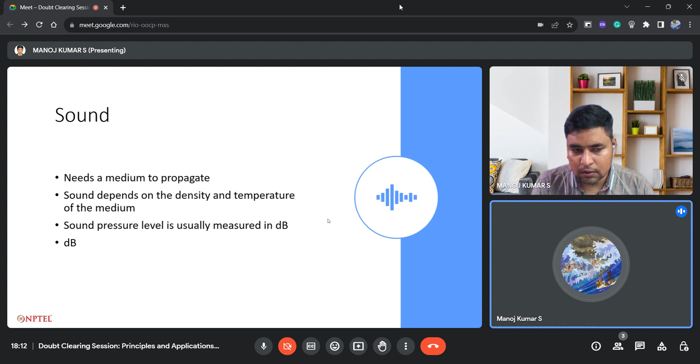Previously we covered what sound is and how sound is measured, and the various parameters associated with sound. Generally, we measure sound using sound pressure level, and its unit is decibels. There are various terms: sound power, which is the actual amount of sound given as output from a source, and sound intensity, pressure, and exposure, which are parameters looking at how you receive sound from a source, from the receiver's perspective, and how it travels.

Last week we covered the relationship between these terms, sound power and intensity, and you can check the previous week's reference.

One more key concept: sound acts almost equally like light. The general concept of sound and light functions the same, but their actual detailed properties vary. For example, in finding the actual light source from a distance, we use the inverse square law, and even in sound, we also use the inverse square law. This example shows, for a given sound power, what will be the sound intensity level at a distance.

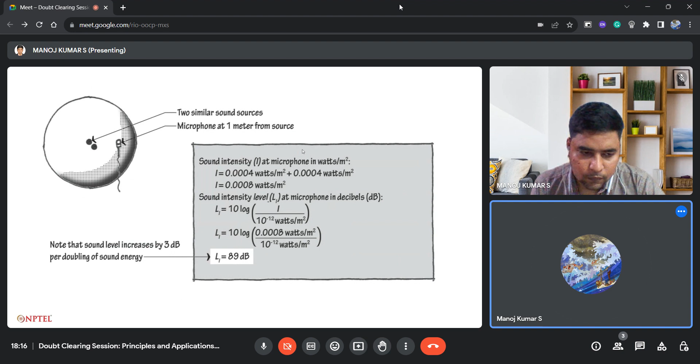To find the resultant sound, we have to compare each sound source's sound intensity level. If there is a large difference between the two sources, the higher one has to be selected. If the difference is very low, within a range of 0 to 3 maximum, and if you have the same sound sources with the same sound intensity levels, you add 3 decibels to that sound source to get the resultant sound.

But if the difference is pretty high, for example a difference of 9 decibels between one sound source and another, we just take the higher sound source's sound level to find the total sound level. So you can check this.

There are many parameters and criteria we use in acoustics. One of these is sound level equivalent, where the sound level for a given space is measured over a time period. The sound L equivalent is the time integrated linear equivalent sound pressure level.

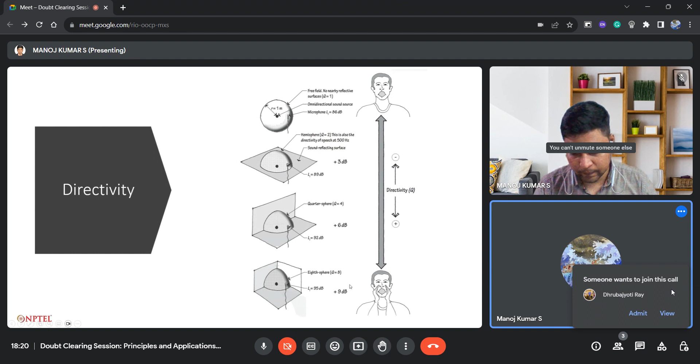Due to the concept of directivity, the received sound level will be higher. If there is a horizontal plane, there is an increase of 3 decibels. If we have two planes from the source, then there is an increase of 3 decibels more. And if you imagine the sound source at the corner of a room, the sound level will increase by 9 decibels due to the concept of directivity.

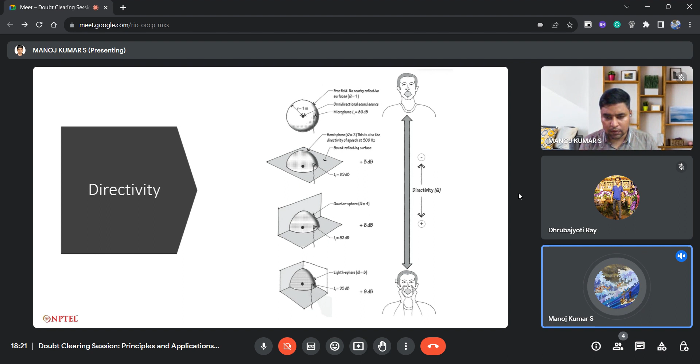I was just covering the previous section because acoustics is a continuum. Last week and this week it will be the continuing thing, and we'll also look into an overview of lighting and lighting design. Lighting we didn't cover much in this module, it is also a larger concept. Here we have just given a basic introduction. I'll cover two key concepts and then show you some example aptitude questions.

With that we close. If you have any doubt, please you can ask me. Moving further, as we are speaking about sound and sound frequency, this image is a very good example.

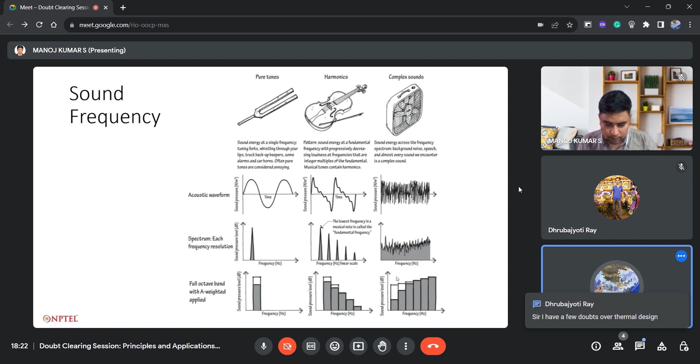You have a question on thermal design, sir? Yeah, please. Is it regarding the calculation of U value, or which one? You can mention it, or you can switch on your mic and ask also.

I will connect mine. You want to ask now? You can go ahead.

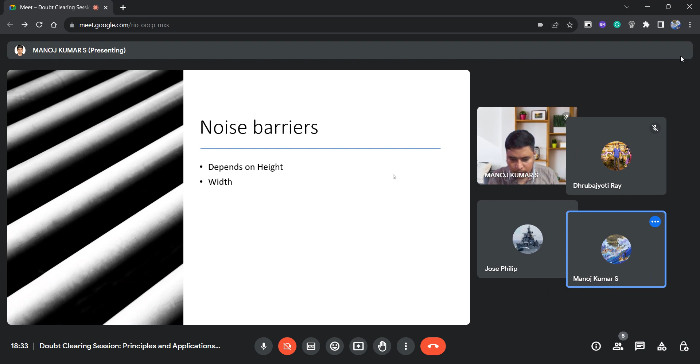Let me proceed with today's topic - moving on, going back to the acoustics part. Previously, we discussed sound and various concepts related to sound, and today we will look into certain criteria associated with building acoustics. One thing is noise criteria, which I discussed earlier - depending on the activity and what type of sound is present in the surrounding or in the space, you can determine this.

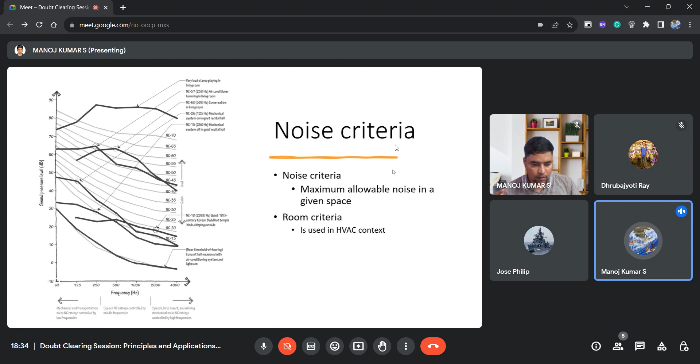Dhrubajyoti asked again about this, related to thermal. He asked why we are placing kitchen in southeast direction. Basically, southeast direction.

People also keep it in northeast or southeast. It doesn't have a direct implication, but one main thing people consider is that in southeast, most of the time period you will get morning time period radiation falling onto the kitchen.

Since kitchen is the space where you prepare food, you want the space to be well lit and receive proper lighting throughout the working time period. Also, solar radiation falling on the surfaces kind of avoids microbial infection on surfaces. All these things play a part.

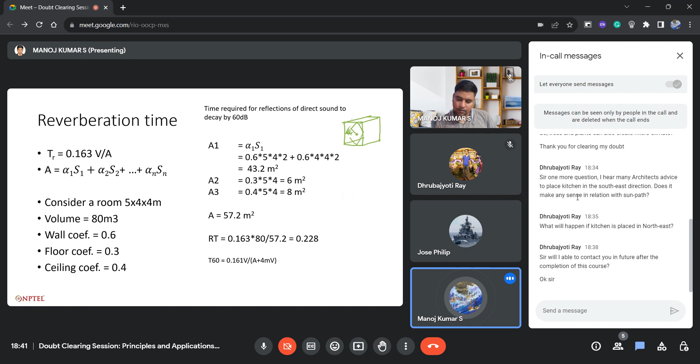Imagine 0 to 1, where 1 is the full sound traveling from the point source. Almost 0.6, or 60%, of the sound gets absorbed, and the remaining 40% gets reflected. This kind of phenomenon keeps happening. That is the part of absorptivity - S1 is the actual surface area.

Using this formula, we try to find the time it takes for the sound to die out by 60 decibels. This 60 decibel concept is related to how this is used. This is a very simple question - you might generally get this problem in the assignment or exam.

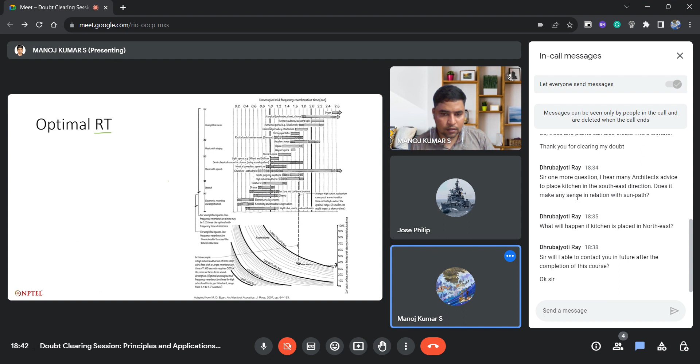Next, looking into optimal reverberation time. A very small reverberation time doesn't mean that the room is perfectly functioning well, because depending on each activity in the room, it might be desirable or not desirable. As you can see on this x-axis, this is the reverberation time in seconds, and there is a range of band shown which is optimal for that particular usage.

If you're using, if you're recording, like here in recording studios and classrooms, all these places where there is some speech going on, one directional speech, or some precise recording happening, it is recommended that the reverberation time is as low as possible.

So that the sound doesn't get reflected from the surfaces and come back after a period of time. But if you look into other places, like music concert halls and musical instruments or chorus, these spaces you can see the reverberation time is pretty high, because if there is a certain increase of loudness due to reflection, it will improve the experience of the music.

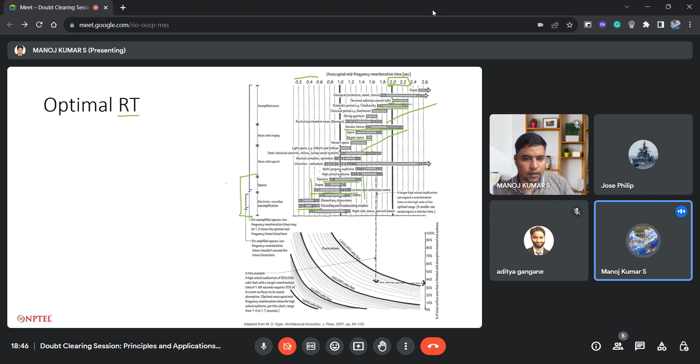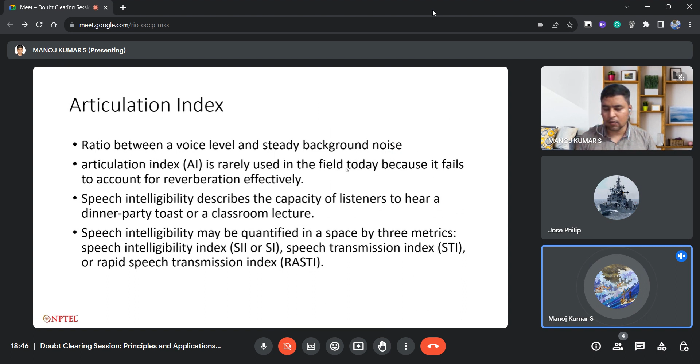Next, let us look into the concept of various speech related and voice indexes. One of them is articulation index. It is a very old one, but it's not used effectively in the field today, because it doesn't account for reverberation. Articulation is basically a voice level, and it's like the ratio between the voice level and the steady background noise. So that is what articulation is.

But speech intelligibility can be quantified using various metrics like speech intelligibility index, speech transmission index, or rapid speech transmission index. These take into account reverberation also. And when you look at this table, this will give you an overview. Like AI is articulation index, this is speech intelligibility index, this is privacy index.

So here the values vary from 0 to 1 generally, and 0 means it will be more effective for confidential privacy, a very silent environment where you want to have confidential speech privacy. And imagine if it's an office environment, it means that only the neighbors will be able to be aware of what you are speaking, and others can't hear.

And if we generally have a normal speech privacy, this is more about a general office environment, where you will be able to hear a few parts and parcels of what they're speaking, but you won't have a great understanding of what they're speaking about. So that will have an AI of 0.2. And this SII, PI, and AI kind of go along together, and this SII value is slightly higher, generally higher than the AI value.

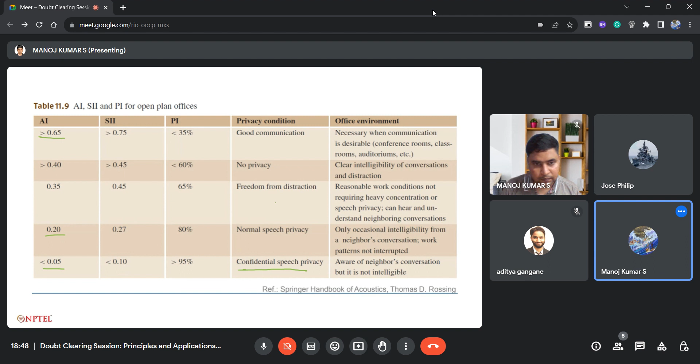And looking at speech intelligibility, as building consultants and construction people add absorption to a room, it approaches a free field condition. This free field condition is like, if you add an acoustic panel treatment in the room, and also this chair you see, it's a very absorptive, porous material type of layer, this will give an effect of trying to achieve a free field condition.

Which means that there is not much reflection happening in the space. And why do we do it? We do it to quiet a noisy place, reduce the reverberation time, and avoid echoes, which is a defect. And we also add reflective surfaces, for example in the case of a concert hall, and also near surfaces near the speaker to increase the sound output. So it's not like we always try to use absorbing materials, we also use reflecting surfaces. That you have to keep in mind.

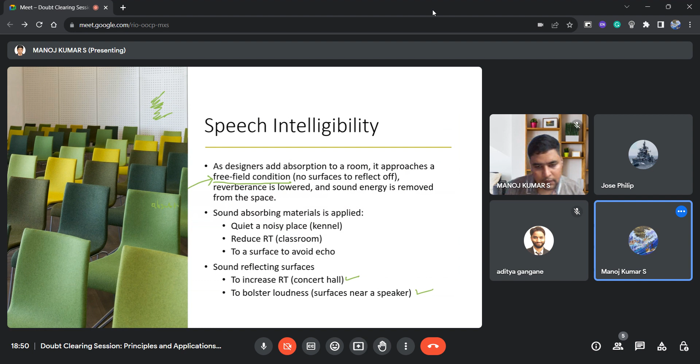And going back to this speech intelligibility index, the values are given, and accordingly you can see the STI index, it's taken in this case reverse, like the STI index, one means it's perfect intelligibility, which means that there is no privacy at all.

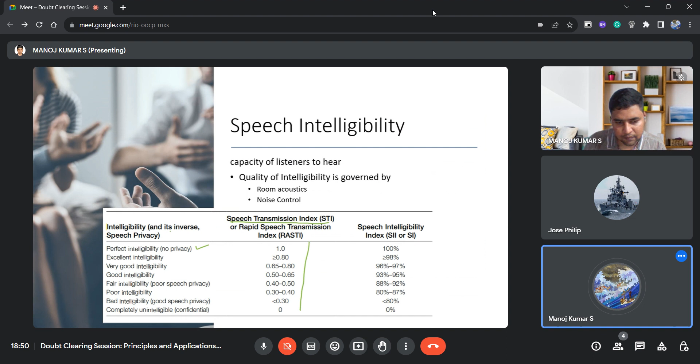And here, completely unintelligible means you can't hear much. And if we have a perfectly confidential conversation, that kind of environment, we call it completely unintelligible. And generally people go for open plan office designs, but it is not good in terms of noise and speech privacy.

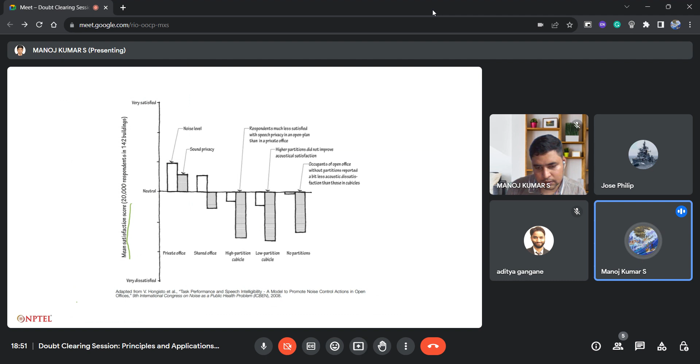This low partition means like 1.2 to 1.4 meter tall partitions, and high partition means beyond 1.4 meters you will have high partitions.

So you can see in terms of noise level and sound privacy, only private offices people have voted that they are satisfied with the environment in terms of noise. But in other places, people showed dissatisfaction in terms of sound privacy.

So this is just an example to show how if you treat surfaces, and in terms of how you provide partitions, you can provide solutions if there's a need of privacy, sound privacy, and noise level. You have to go for one specific approach.

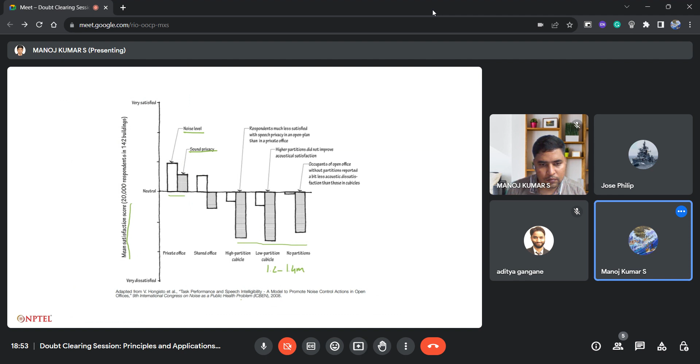Next, one more thing is the clarity of sound. It depends on the rate of sound decay. If we are finding clarity in terms of speech, the decay is found there.

You see it with the first 50 milliseconds. But if it's for music, the reflections are calculated for the first 80 milliseconds, and this is called the Haas effect.

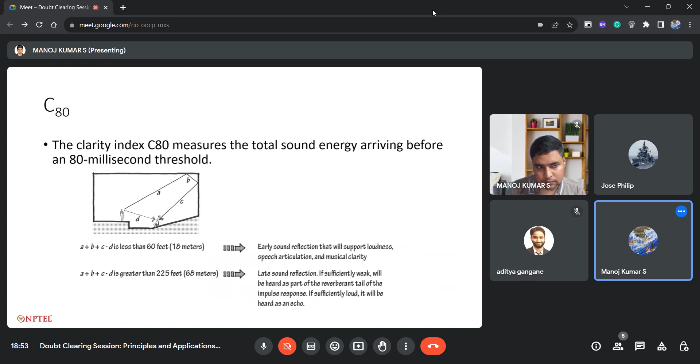So basically, the clarity index measures the total sound energy arriving before an 80 millisecond threshold, meaning before and after what reflection is happening, that we try to find out.

Because if there is reflection within that small time frame, it will be good if it is for the purpose of music related activities like a concert hall or something. It will be helpful in terms of music performance.

Early sound reflection supports loudness, speech articulation, and musical clarity. This is good, like if we have small rooms, and if you have very large rooms, here you can see this.

We have a sound source, and you try to find the reflected distance. D is the direct distance, but A, B, C is the reflection happening from different surfaces and how it will reach the receiver. So you find the distance like A plus B plus C minus the direct distance D.

If the distance is less than 60 feet or 18 meters, it will result in loudness of speech, articulation, and musical clarity.

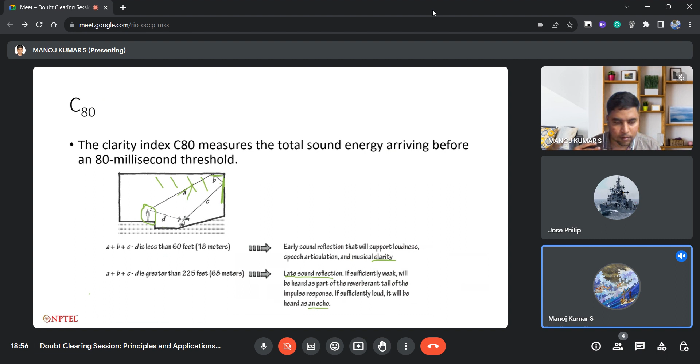So in this example, you can see people use these reflective panels to redirect sound towards the receiver.

A classic example is a very old and famous symphony hall. Here, this hall's whole reverberation time has been mapped with distance from the source of the symphony hall, which lies in a range good for concert music.

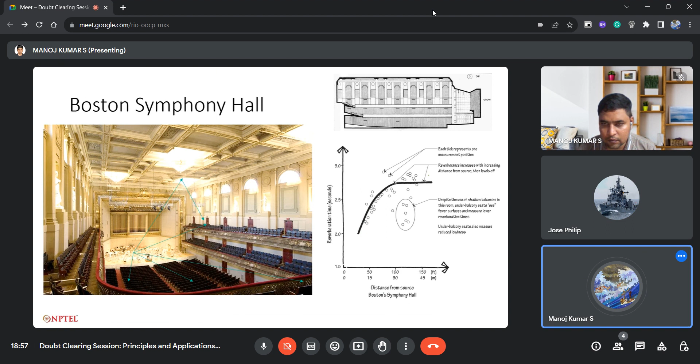Let us go into the concepts of how we rectify defects, how we design, and how we use materials to rectify the noise defects.

To avoid direct reflection, you can use undulations, like surface level treatment. How the surface is designed will lead to diffusion of the sound source.

It's like exactly how light works, where you have this kind of coarse surfaces of different shapes, it will lead to multiple reflection, which is actually the acoustic scattering.

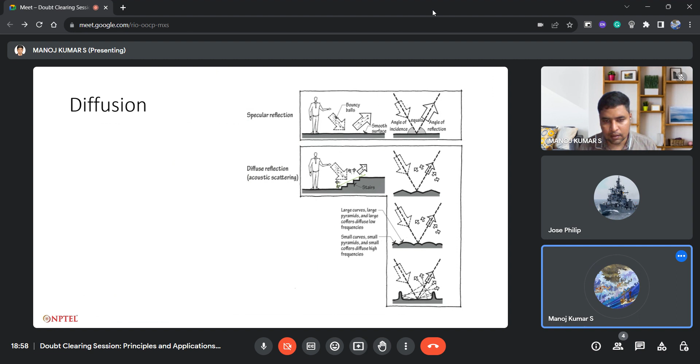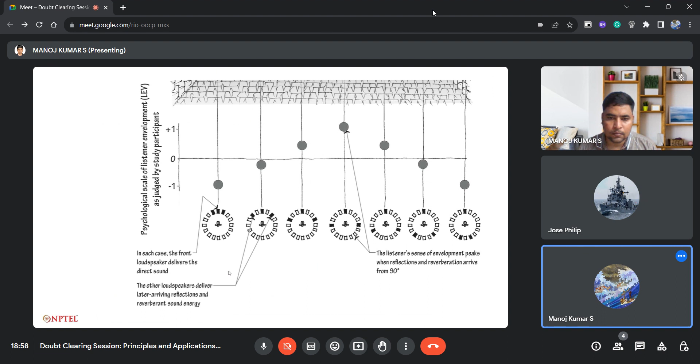Next, there are multiple defects that happen. One thing we usually talked about previously is the echo, where you have a sound source and due to the reflection of the sound, the receiver might receive doubling of the actual sounds from the particular first sound source.

This echo we avoid by decreasing the reflection distance or by providing absorptive materials. Next one is flutter echo.

If you have two parallel surfaces, the voice keeps reflecting back and forth. This will also lead to a small echo, which is called flutter echo. This can be rectified either by providing absorptive acoustical treatment or by splaying the surface, making it non-parallel.

Next defect is the focused echo, where if you have a concave surface, it creates two defects. One is focusing, another is creep. Focusing is like if you are at the focal point. Generally, if you have a curvilinear surface, you will have one focal point.

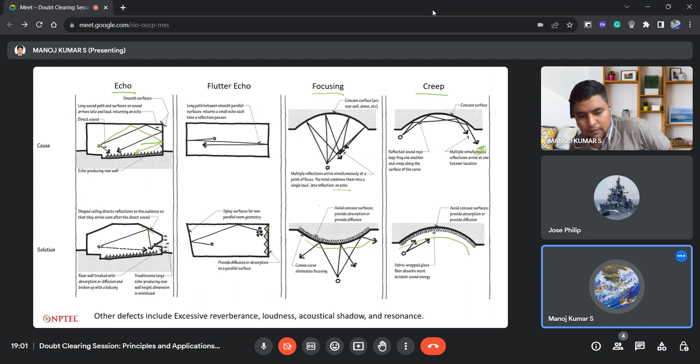These also can be rectified either by using absorptive materials or by using a convex surface. There are also other effects like excessive reverberance, loudness, acoustic shadow, and resonance. Next, in terms of treating the defects, the material also plays a major role.

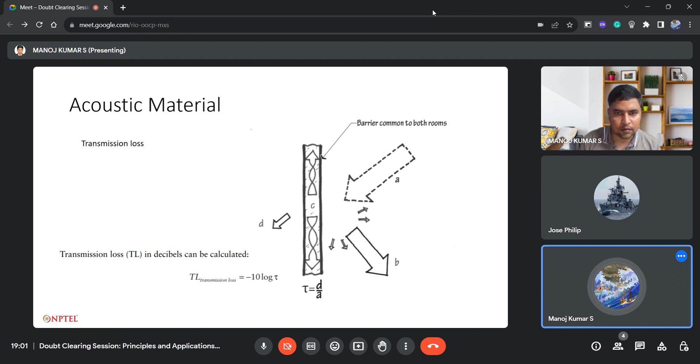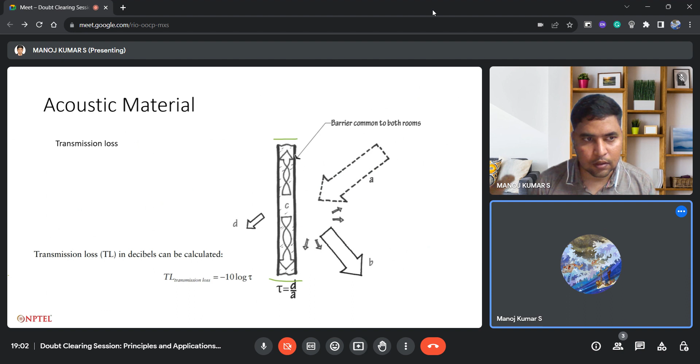You add all these and then take an average to find the noise reduction coefficient. There are different types of acoustic materials, generally porous, panel, and cavity absorbers. The NRC also ranges from 0 to 1.

One example of a very high noise reduction coefficient is snow. Going further, as I mentioned, there are three types of absorbers.

One is the porous absorber, which contains a perforated material that absorbs the sound. The sound internally travels and gets reflected within the material, and then it dies out. That's how porous absorbers function.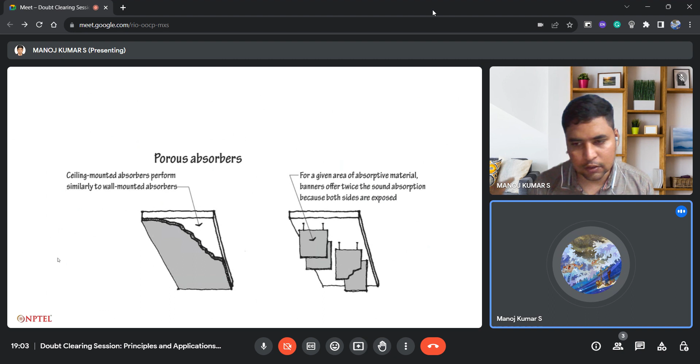Next is cavity resonators. Here you have a hollow block of body, and it will have small holes in it, so the sound enters and then it gets internally reflected, and it dies out over a period of time.

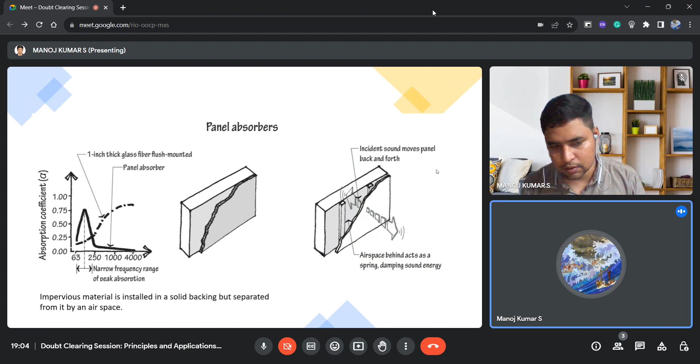Next is panel absorbers. Here you have an impervious material generally installed onto a solid backing, but there will be an air gap separating the solid backing and the actual panel absorber. There are various panel absorbers; here you can see an example of a porous absorber mounted onto a furring.

These are the associated alpha values for particular frequencies. Here you can see the absorptive material; it might be a very good absorbent for a particular frequency only. So you have to carefully choose the material based on the sound source.

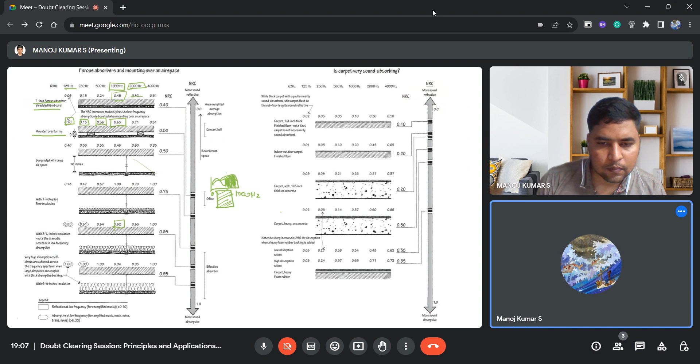And with sound insulation, we also aim to attain a sound transmission class, STC. These classes are defined based on the type of activity and the space required. For example, a laboratory or kitchen needs an STC value of 30 or above.

This tabulation shows the various ranges of STC values and the actual performance in the description. For example, 40 to 50 is a very good range but not fully understood; a loud speech is heard very faintly also in this range of 40 to 50.

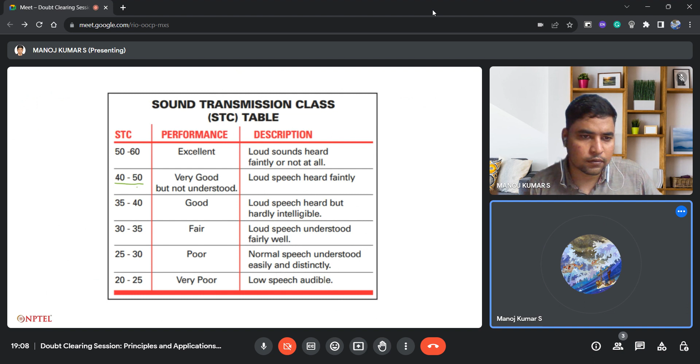Next, we look into lighting. When we talk about lighting, the first thing is the source - the light and what range it belongs to. Light is basically an electromagnetic wave which falls under the visible light range, between 380 to 780 nanometers. This is the only range we are able to see.

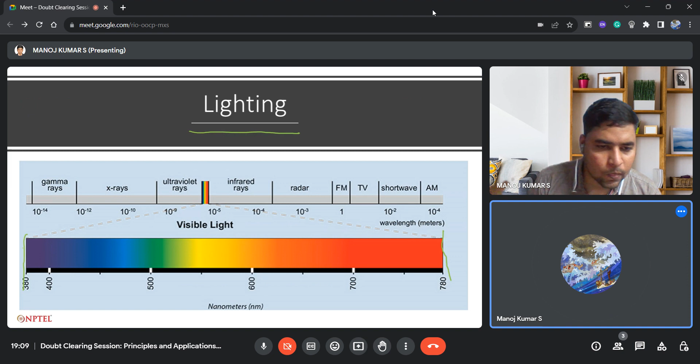Here is a section showing various other electromagnetic radiations and what range the visible light belongs to. It's basically a very narrow range when you consider the whole electromagnetic radiation spectrum.

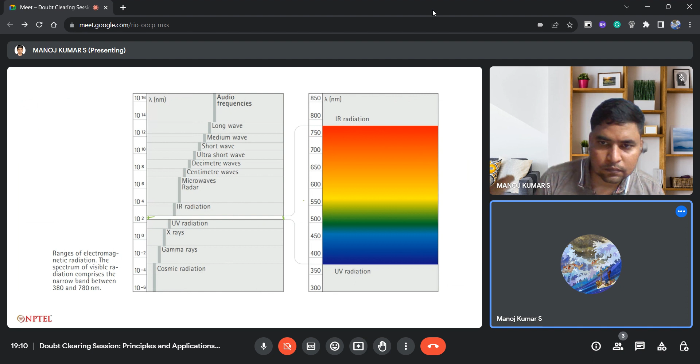There are a few terminologies to keep in mind when you look into lighting design. First, let us start with the source. Luminous flux is about the light source - the total amount of light being emitted by a light source. It is measured in lumens.

There is another concept called luminous intensity - the light flux emitted by a light source in a particular direction per unit solid angle. This conical illustration in the diagram shows the luminous intensity, and once the light source is there, it will fall on a particular surface.

This is measured as illuminance, the amount of luminous flux from a light source falling on a given area. It's measured as lumens per meter square, generally called lux.

And what the human eye perceives - the light that humans perceive due to reflection from surfaces - that is the luminance, the ratio of luminous intensity of the surface to the projected area of the surface, whose unit is candelas per meter square.

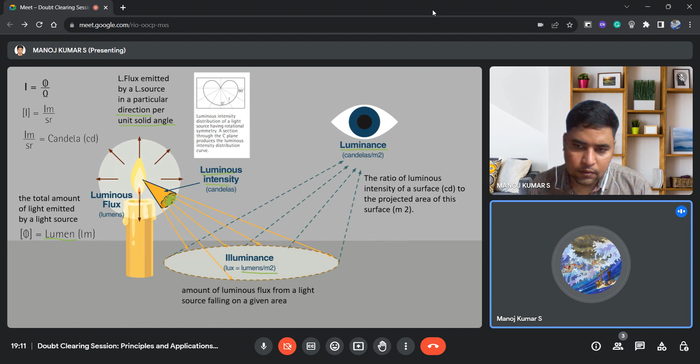There are various parameters that influence the quality of lighting comfort. Here we talked about illuminance and luminance, and there is this concept of glare, spectral energy distribution, color temperature, rendering, and flicker. Glare and flicker are defects which we try to avoid, and spectral energy distribution, color temperature, and rendering are light quality parameters which we have to selectively choose from.

Luminance and illuminance are basic parameters. We kind of set a benchmark illuminance level for a particular activity and try to achieve it in general case.

Next, we look into daylighting. Daylighting is basically the light that we receive due to the sun, solar radiation, and it should not be confused with solar radiation. Solar radiation is a heat component. Daylighting generally just takes the lighting part, the luminance.

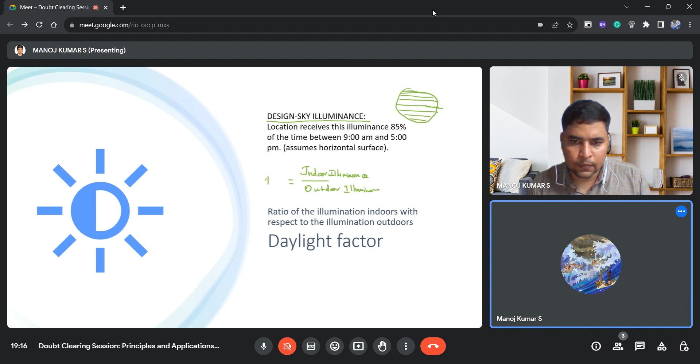Next, speaking about glare, it is the effect of brightness or the brightness differences within the visual field, which causes annoyance, discomfort, or loss of visual performance. So generally, due to light, you kind of get discomfort or irritation. Try to avoid glare as much as possible.

There are two types of glare. One is discomfort glare, another is disability glare. Discomfort glare, as the name suggests, creates some level of discomfort, but there won't be full loss of sight due to the glare. But disability glare creates a total loss of visual performance.

When we look into lighting, there are two different parts. One is diffuse lighting, another is direct lighting. Direct lighting is due to a single point source; on a particular object, it will create direct light and then create sharp shadows. But if you have lighting coming from different directions, it will create very soft shadows, or there won't be a shadow at all.

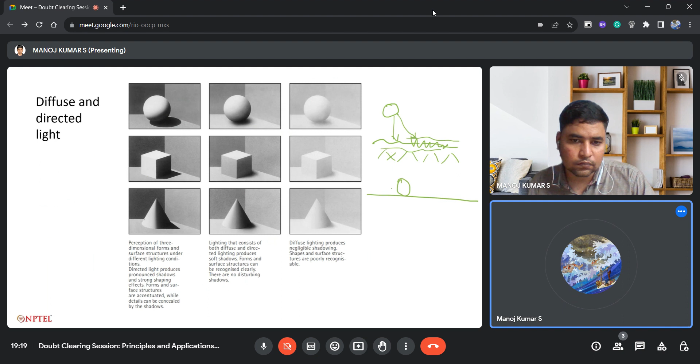Next, let us look into artificial lighting concepts. Artificial lights basically convert electrical energy, and what happens is it heats up an element to an excited state where the element starts emitting radiation, electromagnetic waves. Since some few metals emit radiation in the visible spectrum, using this concept, artificial lights emit visible light using electricity.

Luminous efficacy is basically the ratio between the light output and the actual energy used, so the unit is lumens per watt. The lumen is the light output, and this is the power input. So for every given watt of power, what is the lumen output?

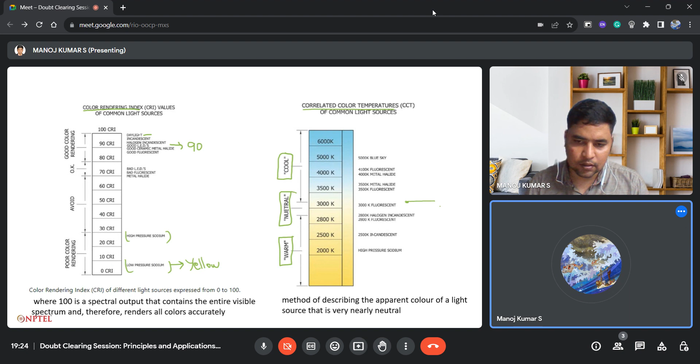For daylight factor, example: the outside illuminance is 8000 and the room average illuminance is 240. You take a ratio of them to get the daylight factor. In this case it is 3%.

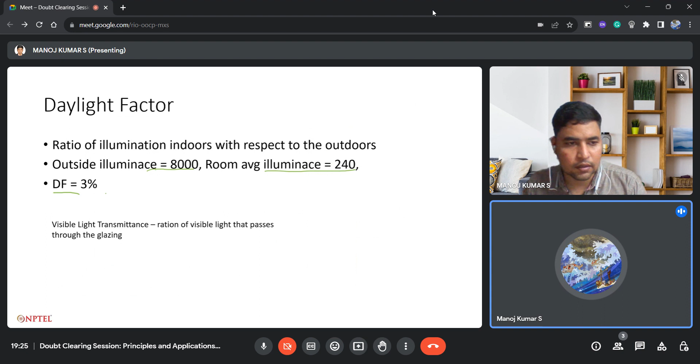There are also other associated lighting measurements that you can incorporate in the lighting design. One is daylight autonomy, which is the percentage of annual daytime hours that a given point in space attains a particular illumination value. For example, 53% of the whole floor area is above 50% of the daylight autonomy value.

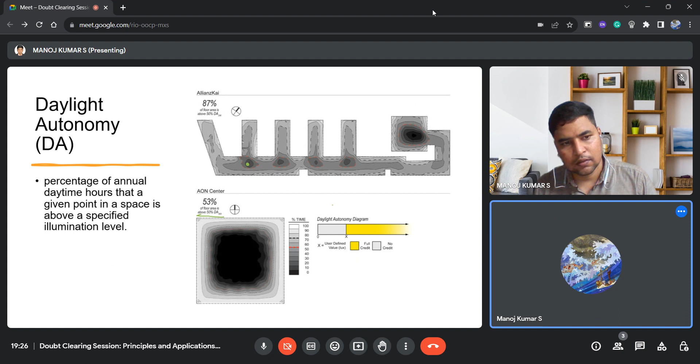You fix a particular illumination value and check whether that particular point attains it over a particular duration. Useful daylight illuminance is more like a band of values instead of one particular value to check against. Here it has a particular band, for example ranging from 100 lux to 2000, checking what percentage of floor area has at least 50% useful daylight illuminance over the period of time.

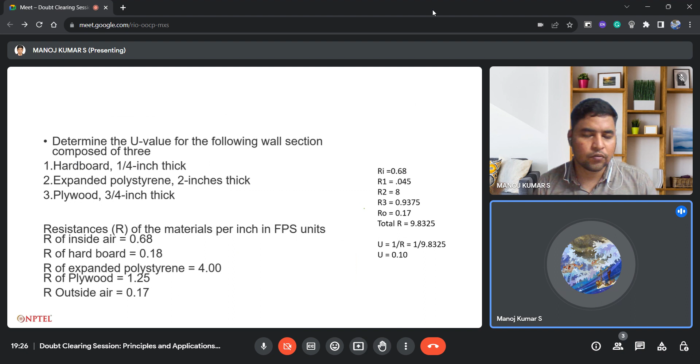These are a few useful lighting measurements which you can utilize when you design spaces. You can use various lighting softwares, nowadays they come along with design softwares. For example, as previously mentioned, Design Builder also includes a few lighting design analysis tools.

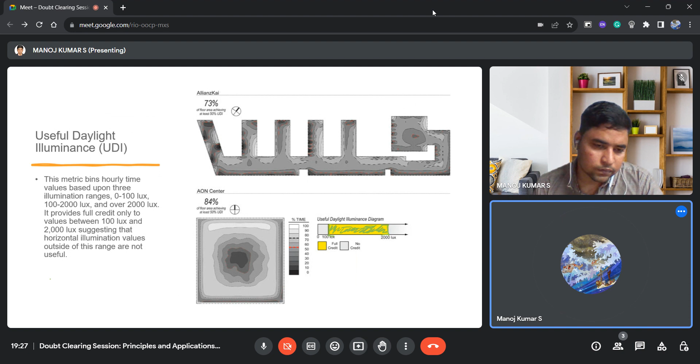Next, let us look into a few example questions. Laboratory testing of STC in general does not account for flanking transmissions. Articulation index below 0.2 indicates speech privacy. If it goes beyond 0.4, it means there is no privacy at all.

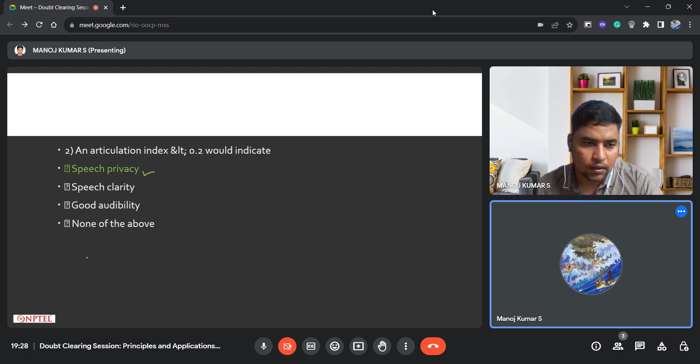Room mode is a factor of room dimension.

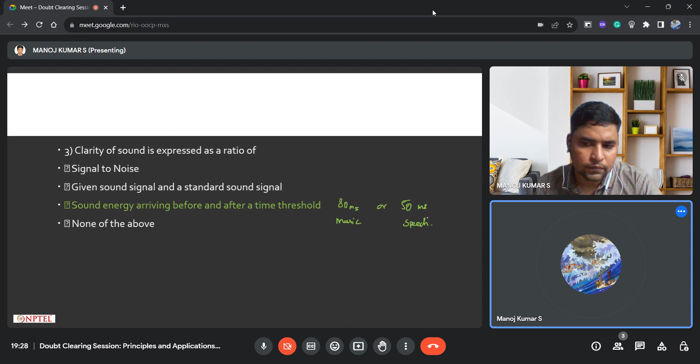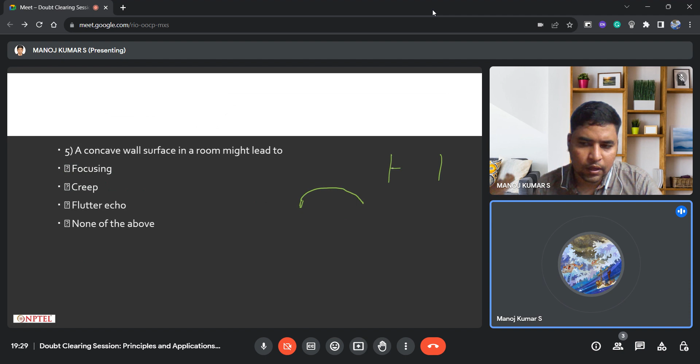Next, we have a concave wall surface - what will it lead to? Flutter echo is basically due to parallel sound surfaces. For concave surfaces, one effect is focusing of sound, another is creep. Both focusing and creeping will lead to this phenomenon.

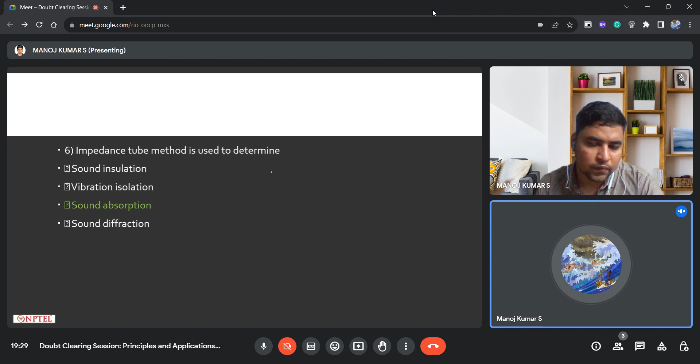The impedance tube method is used to determine sound absorption. For materials we generally measure only sound absorption using this method, finding the sound absorption of materials. Further, we can also find the NRC value, which is basically an average of alpha for different frequencies.

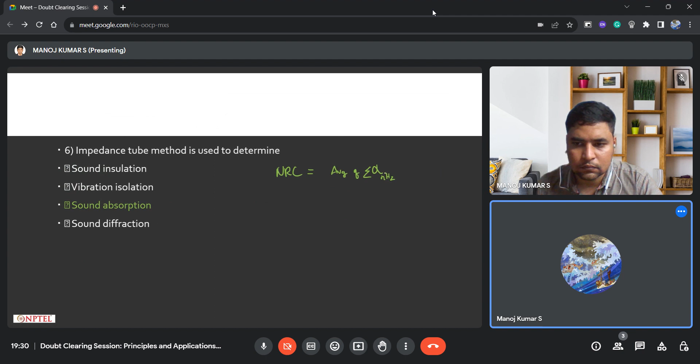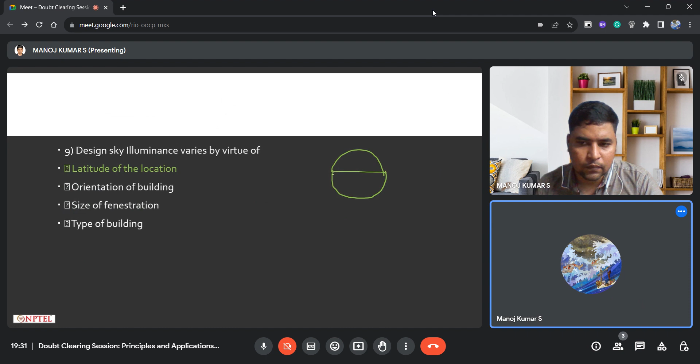Design sky illuminance varies, as said before, depending on the latitude. The equator will receive the highest illuminance, around 11 K lux, which keeps decreasing - so it varies with latitude only.

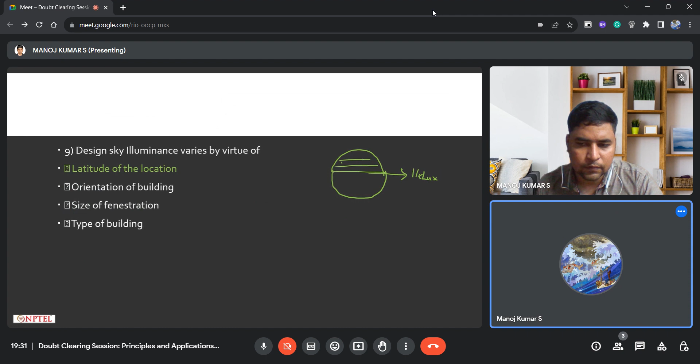Open loop daylight controls - there are open loop and closed loop daylight controls. Open loop only considers the daylighting part, so it's basically natural light.